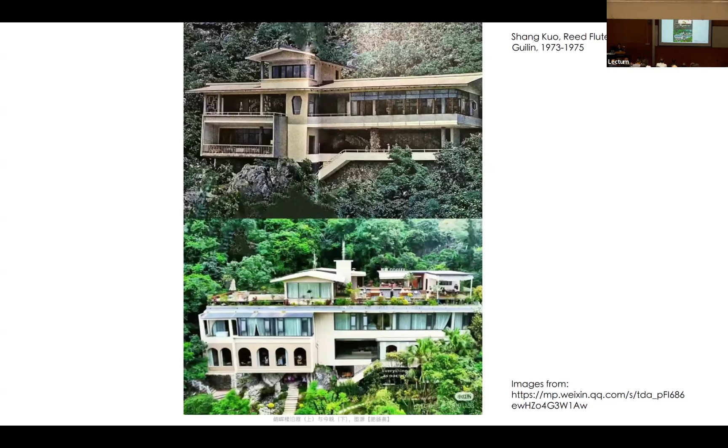Let's begin with a recent controversial renovation project. The upper is the original design and the lower is a hotel transformed from it. The original was a reception house built in Guilin's Reed Flute Cave scenic area in 1975. It exemplifies a local modern approach in China, blending modernist principles with vernacular language. The ground floor of the construction drawing included contour lines and annotations of rocks in the site, and showed how the building integrated with the topography.

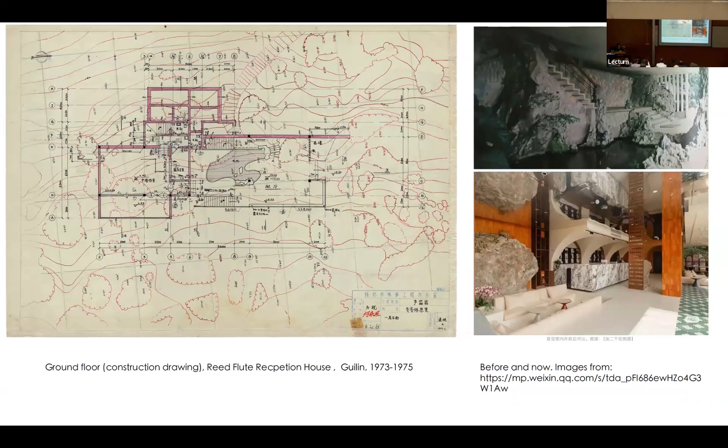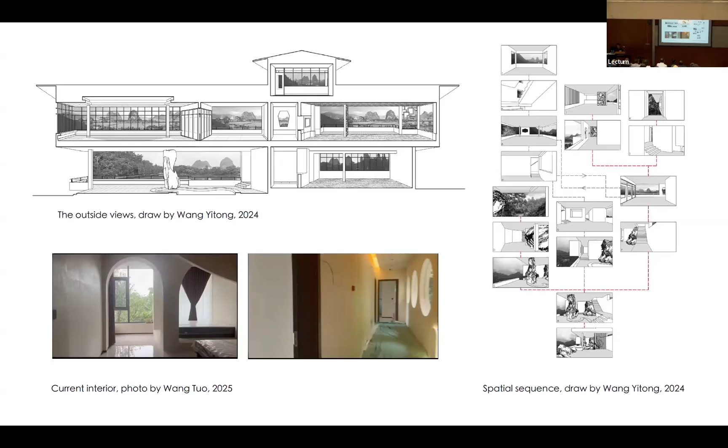These drawings show how the original spatial organization deliberately built up the open relationships between the interior and the outside view. But all these qualities are lost in the current renovation project. These projects were widely circulated in the 1980s. These are drawings by Shang Kuo, the architect of the reception house.

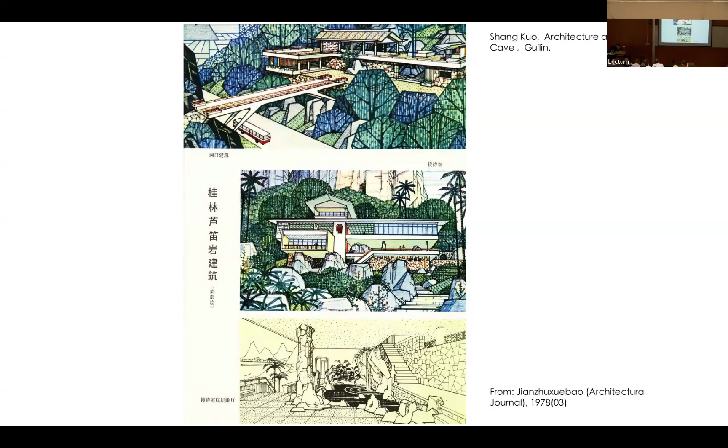A lot of criticism focuses on taste and economic issues. It indeed unveils a lack of awareness about the modern history of Chinese architecture, which hinders discussions on modernity in Chinese architecture and on the value of contemporary Chinese architecture in China. In fact, many architecture students today do not know these works and even have no idea about architecture activities in the 1990s.

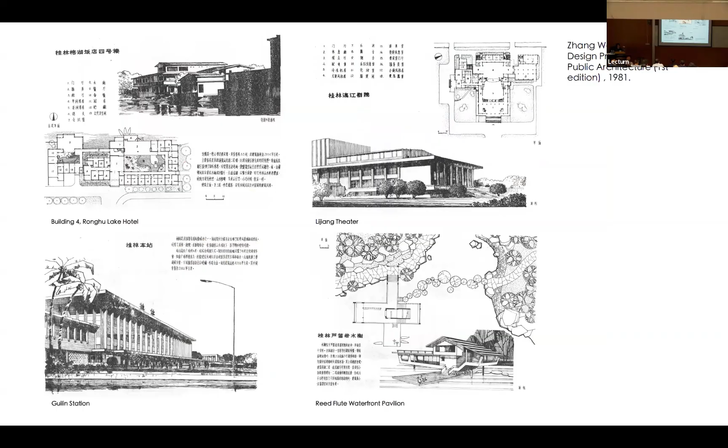This is a widely used design textbook, Design Principles of Public Architecture. Its first edition was published in 1981 and the second in 2001. The first edition had 43 Chinese cases, serving as a record of modern Chinese architecture of the time. Four of them were from Guilin. But the second edition retained only five cases from the first, none from Guilin. Actually, in its 2008 edition, only one project, this one, Tanggu's railway station, was kept. They were all replaced by newly built projects.

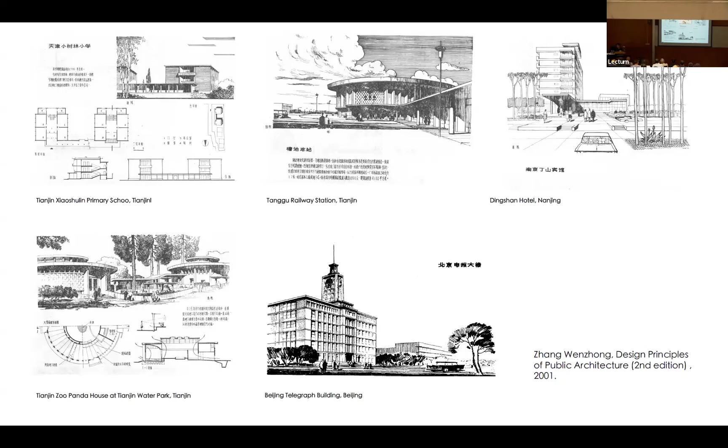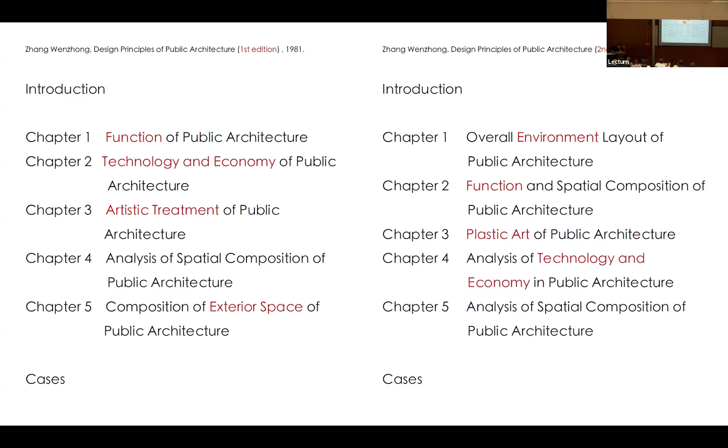Yet, the core design principles remained largely unchanged. Comparing chapter structures of the first and the second editions, there was a shift in priorities. Architectural artistry gained more importance in the design. You can see this move from the list. It is hard to tell how carefully the students read the book, but it reflects the disciplinary consensus at the time.

So let's go to the problem of knowledge, design knowledge. From a historical viewpoint, during the 1950s and the 1980s, architectural projects in China had three major trajectories. Symbolic and monumental, often represented by large-scale public buildings. Functional and productive, such as industrial buildings, housing, and hospitals. The third is a poetic and autonomous approach, often in relatively small scale landscape buildings, blending the modern with certain locality. The reception house is a part of it.

The Outline of Modern Chinese Architecture History, published in 1989, is the first real historical book on post-1949 architecture in China. And it was one of the early narratives which treated pre- and post-1949 architecture as a continuous process. Interestingly, the three authors were not historians and took themselves more as architects.

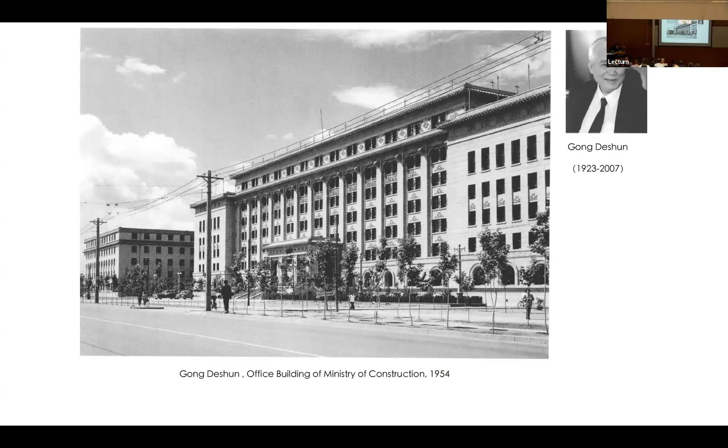And the Chaobasan International Hotel in Mongolia, which was regarded as a celebrated project of modernist design by Chinese architects abroad. After the Cultural Revolution, Gong Deshun made a great effort toward restoring architects' creative autonomy. Thus, the Outline of Modern Chinese Architecture History largely represents architects' viewpoints and values.

This can also be manifested in the second edition of Design Principles of Public Architecture. I quote: public buildings of different purposes exhibit notable distinctions in architectural artistry. Civil buildings like offices, schools, and hospitals constructed en masse for public services should prioritize clarity, simplicity, and restraint. Large-scale edifices, hotels, theaters, stadiums demand sophisticated artistic treatment due to functional complexity.

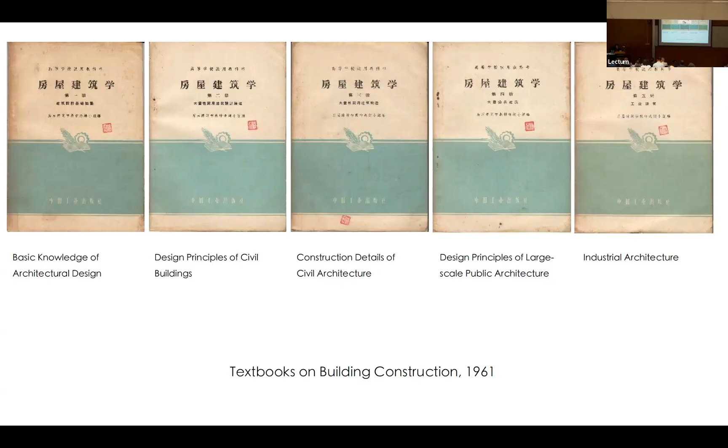And the third problem is the concept, or relation between words and the buildings. Loosely using concepts is a big issue in Chinese architecture, and it could be exemplified by two texts, Feng Jizhong's Principles of Spatial Planning and Peng Yigang's On Architectural Spatial Composition, published at almost the same time. While the English titles differ, they both use the same word in Chinese, 组合. But if we look at the designers' design works, the distinction is obvious. Feng came from German modernist training in the 1930s, while Peng's were largely based on the Beaux-Arts tradition. The shared terminology obscures divergent knowledge systems.

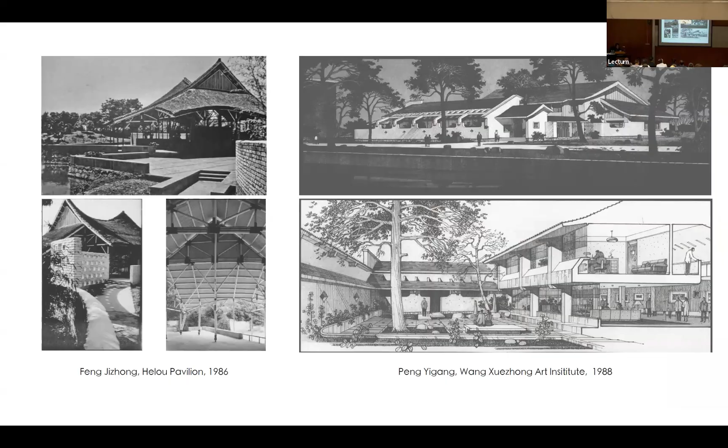When Adrian Forty observed the vocabulary of modern architecture, he found out modernist language is a system. He said, wherever two or more of the words form, space, design, order, or structure are found in company, one can be sure that one is in the world of modernist discourse. Disturb one and you disturb the lot.

The way modernists used words corresponded with their ideas on architecture. It sought neutral, non-metaphysical terms, except those from language and science, to assert architecture's autonomy from art. And one of its features is a general tendency to render what is concrete abstract. Against this problem, that's the context in which the new knowledge centered on construction was formed. I will examine it from four aspects: ideas, institutionalized knowledge, tools, and objects.

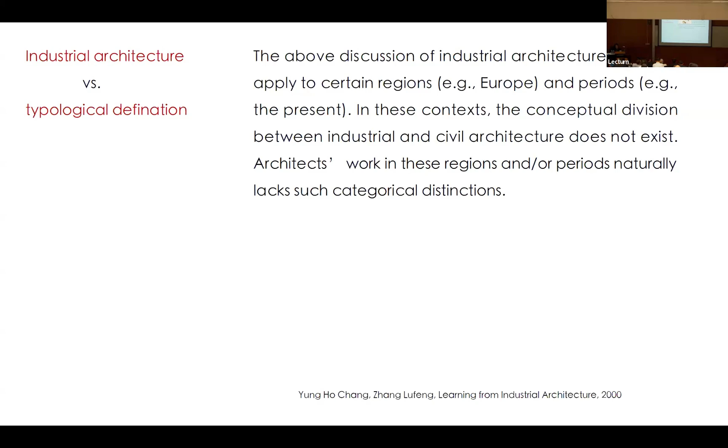Around the same time, Nanjing-based architect Zhang Lei proposed his vision of fundamental architecture. In his statement, the term ordinary appeared more than one time. Constructing architectural quality through ordinary materials, construction methods, and building types became a characteristic of the new practices during this period.

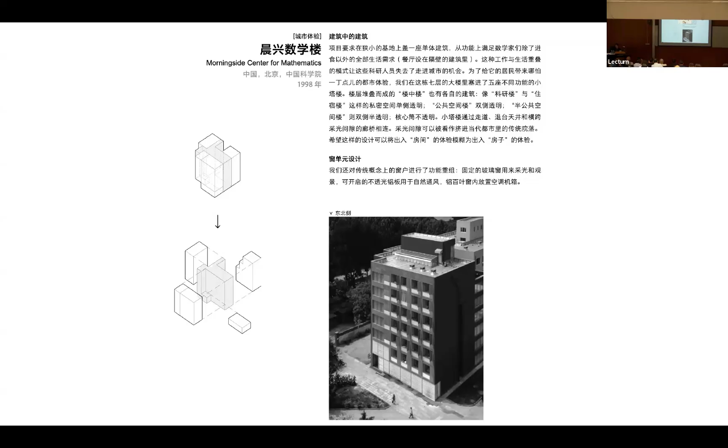This is the Morningside Center for Mathematics office building designed by Feichang Jianzhu. They embedded the concept of a micro city into the spatial organization of the single building volume, creating a building complex within a building, using varied materials treatment while employing the then prevalent concrete frame structure.

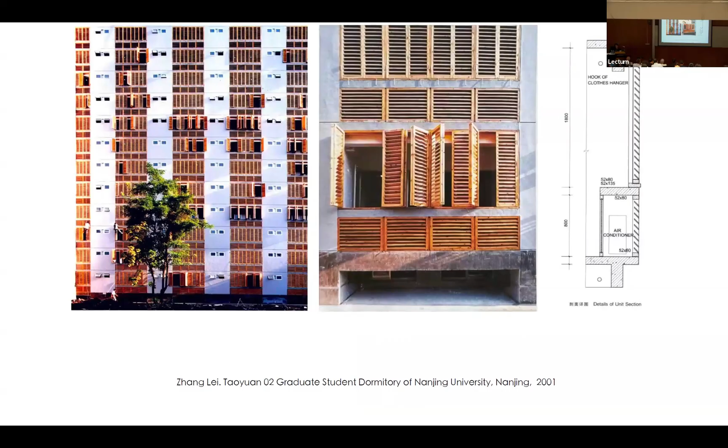Another example is the student dormitory designed by Zhang Lei in 2001. Adopting a typical central corridor arrangement, it translated the requirements for ventilation, storage, and privacy into architectural language and visual expression. For Wang Shu, even lamps, fixtures, pictures possessed architectural quality, as seen in his 1997 design called 8 Unlivable Rooms.

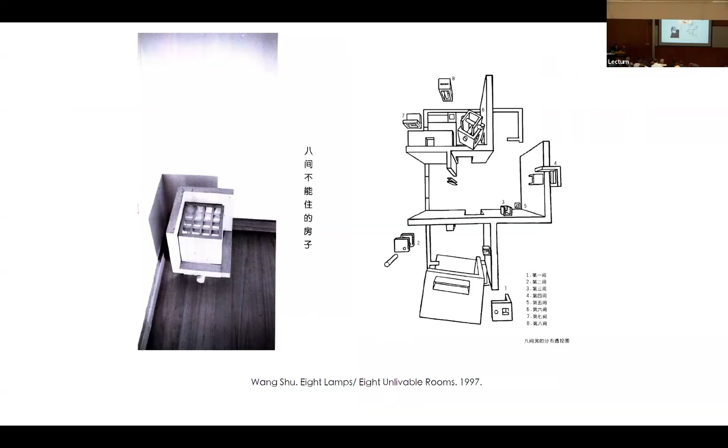He remarked, I quote, "For me, whether an architecture concept can permeate into details is not merely a technical issue, but a transformative perception that returns to the details and the life itself from the very beginning of the design." Well, one might attribute this to the project types available to them at the time. It is a conscious choice, and more significantly lies in the embedded architectural understanding and philosophy.

Architecture's significance resides not only in typology, scale, or symbolic reinterpretation, but in infusing ideas into the act of construction and the inherent architectural quality of building. Notably, this differs from abstraction; returning to the basic or original means reducing things to an irreducible state while preserving or revealing their fundamental attributes.

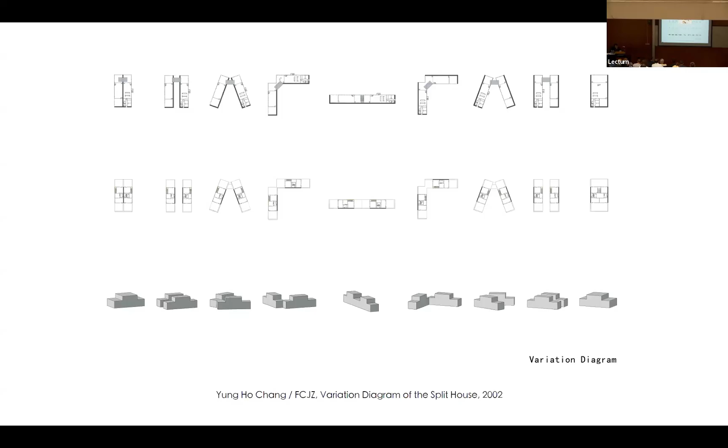Zoom in, we can see the wall solidities, opening directions, and the staircase position. It's somehow like the Beaux-Arts parti. We might call it abstraction with materiality.

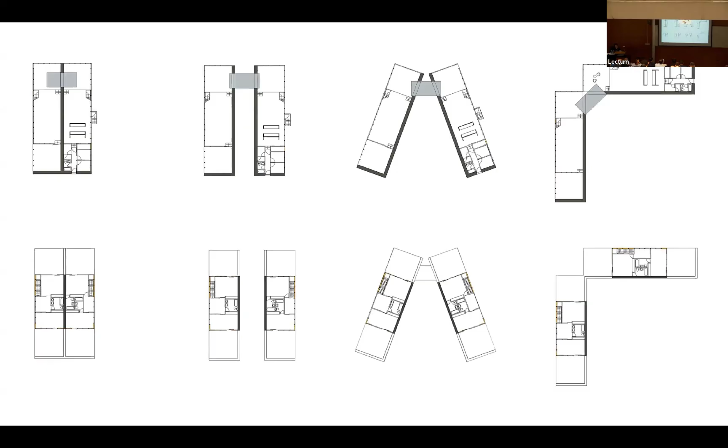Institutionalized knowledge to schools. In 2000, two new architecture schools were established: the Graduate Center of Architecture at Beijing University and the Graduate School of Architecture at Nanjing University. Both aimed to build a new pedagogical system based on new understandings of architecture knowledge.

They all took construction and the tectonic as a core curriculum and research direction in design. This is for the Graduate Center of Architecture in Beijing University. Here is the research direction. This is the Graduate School of Architecture at Nanjing University, and Professor Wang Junyang is a part of this. This is the design course arrangement in Nanjing University: basic design, conceptual design, and tectonic design.

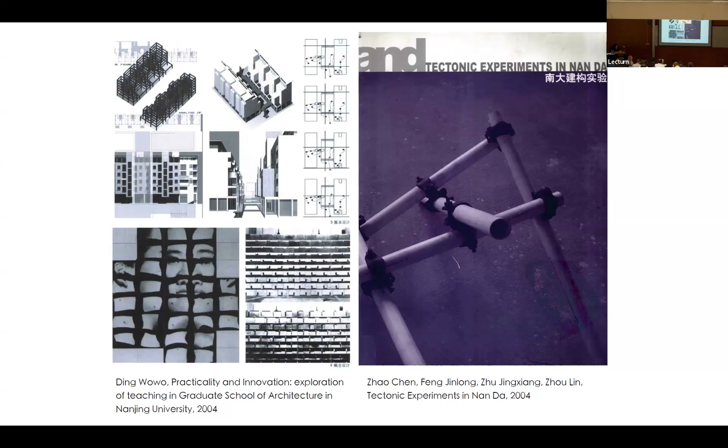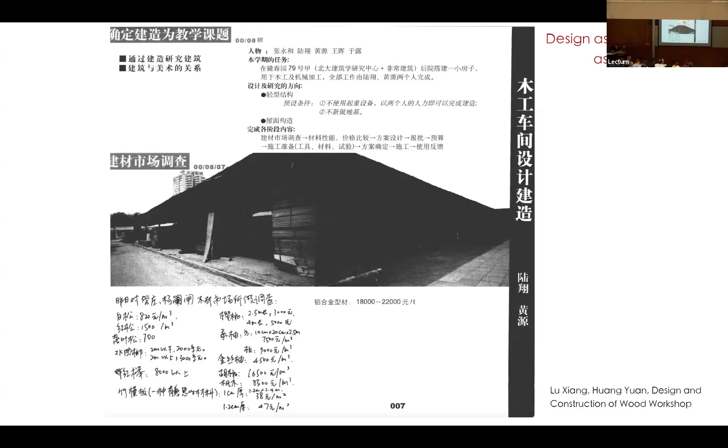This documents the construction course at Beijing University. The course was to build an actual building, a wooden workshop in the courtyard of Beijing University's Architecture Research Center. The complete documentation reveals a research process encompassing comparative analysis of multiple proposals, material-based structure calculation, etc., and also the engagement of students in drafting, calculation and the labor work on site.

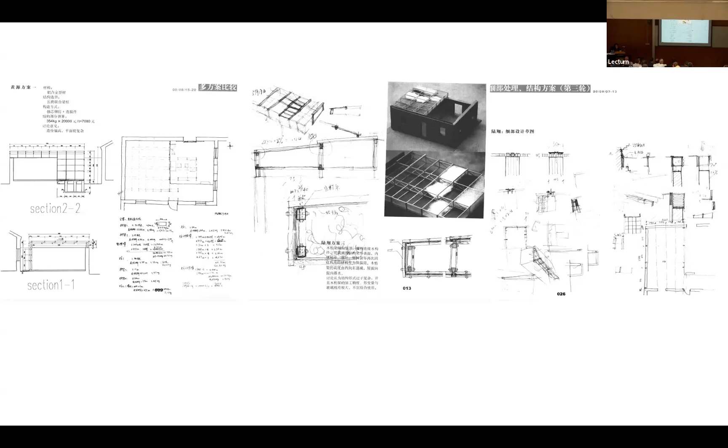Yeah, it's 5 minutes. Okay. So I skipped some images and yeah, this is what they do.

Manual operation becomes important in the design process. It might be unexceptional in European or American architecture schools, but it has distinct significance for China. As Zhao Chen commented, to promote tectonics is to resist the negativeness in contemporary Chinese architecture, i.e. the tendency to label architectural creation with styles, the commercial inclination of architecture subject to economic power, and the cheap symbolism of architecture attached to political power or mass production driven by consumerism.

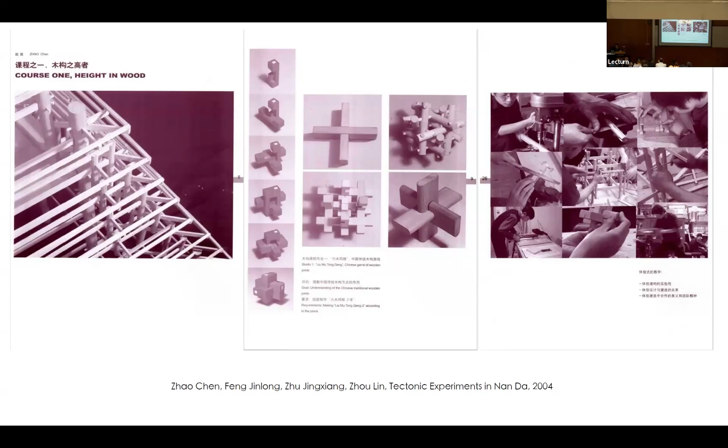And simultaneously, the tectonic perspective allows re-examination of China's architecture traditions and facilitates cross-cultural reassessment of global architecture heritage. Zhao's perspective manifests in the editorial structure of the first issue of Nanjing University's A+D journal.

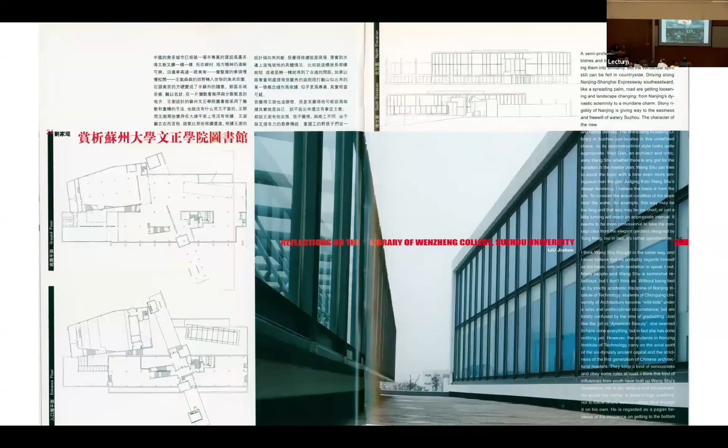This inaugural issue featured international architectural works, projects by young Chinese architects, criticism including Liu Jiakun's comments on Wang Shu's Wenzheng College library, documentation of the contemporary Chinese urban condition, and importantly, a theoretical framework in global context by Professor Wang Junyang's interpretation of Frampton's study in tectonic culture. It also includes an interview with Feng Jizhong on tectonics.

The bilingual publication shows their intellectual ambition to contextualize domestic practice within international theoretical discourse, with the attempt of constructing a modern tradition for Chinese architecture.

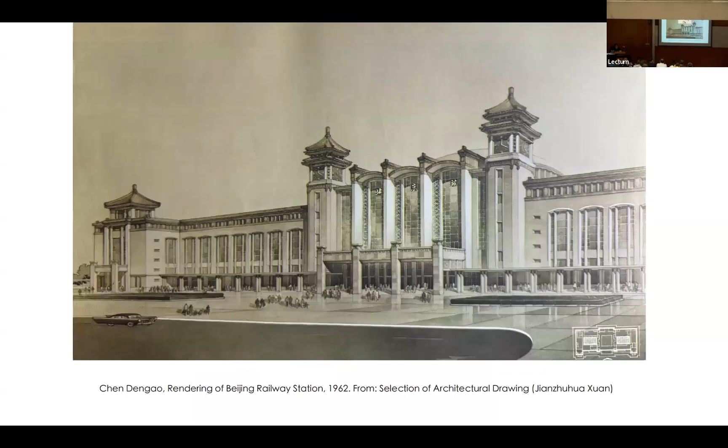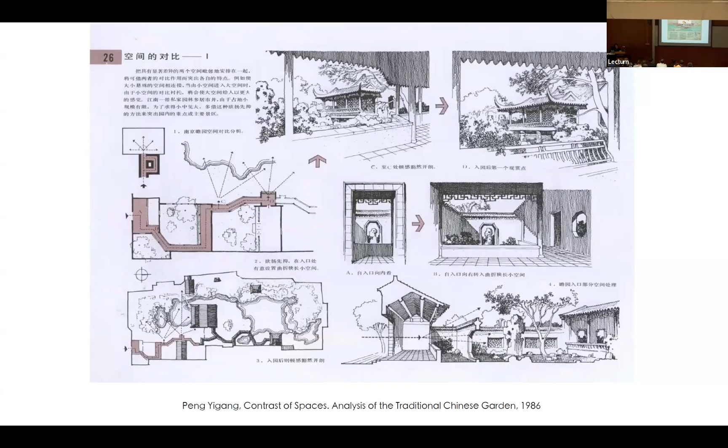The tools. The drawing. I skipped this. Drawing is always important for the architecture discipline, and from Jeff Kipnis's viewpoint, a drawing itself possesses autonomy and independence. Drawings are important in Chinese architecture education, and that's a basis. And the rendering shows the representation, as an analysis and research tool, and also as construction guidance.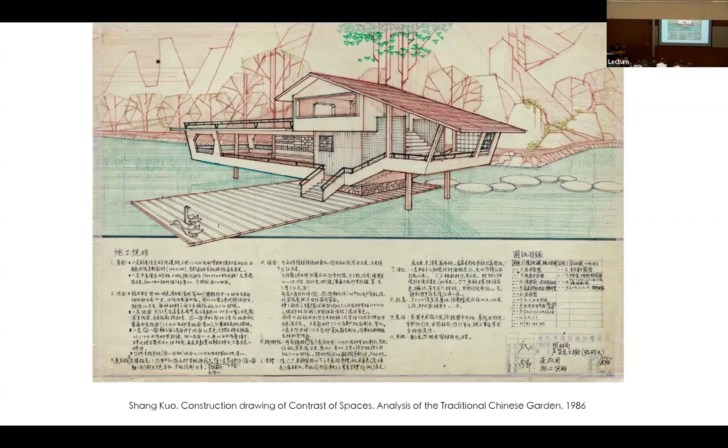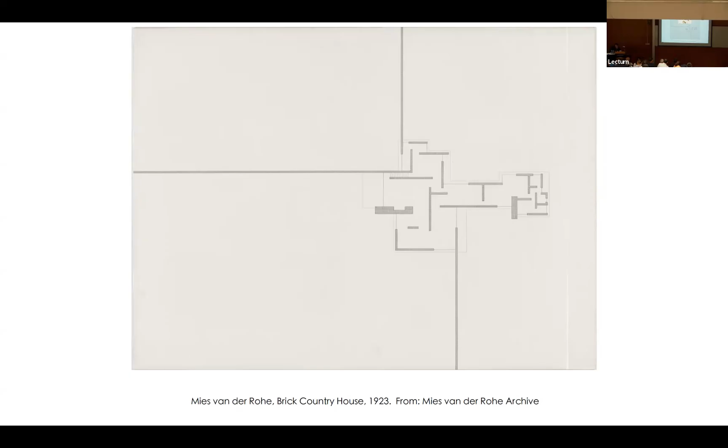Yung Ho Chang stood out as one of the few architects who consistently reflected on this tradition. Against drawing in fine arts architecture, he promoted drafted drawing, and he differentiates between drafted drawing and artistic drawing. Quote, for him, architecture's essential skill is drafting, not painting. Painting or artistic drawing belongs to aesthetic cultivation, while drafted drawing constitutes paper construction, and drafted drawings prioritize precision and accuracy over aesthetic quality. Skip this.

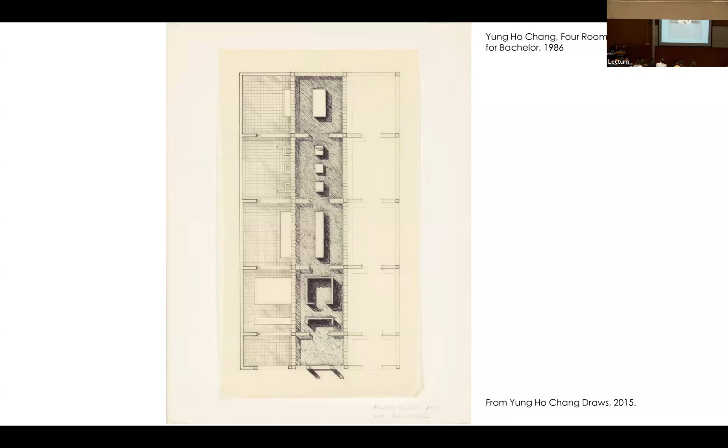Yeah, this is another drawing, and it's even like they put the axonometric drawing and the plan together, but it's not easy to understand at first glance. You have to read it carefully and find that some parts actually cannot really be shown in this drawing, in the plan.

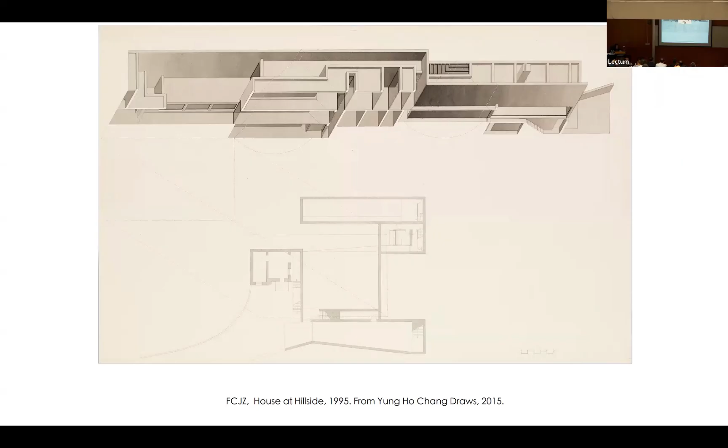The sectional axonometric uses a U-shaped cut through the building interior, unfolding to reveal a continuous spatial composition, a vision beyond instant perception. This was already shown by Yung Ho.

And what I want to emphasize, if you see this kind of multiple... these are kind of a collage of the different types of drawing, and actually, if you look at the drawing, you have to move through it. It's this kind of reading of the

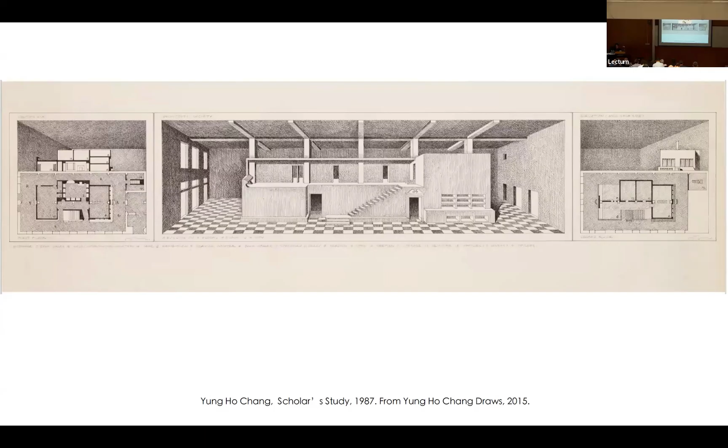collage of the axonometric and the multiple vanishing point perspectives keeps the viewpoint in constant motion, requiring intellectual and perceptual interaction to achieve interpretive discovery and pleasure. Wang Shu also demonstrated this acute drawing consciousness in his sketchbook.

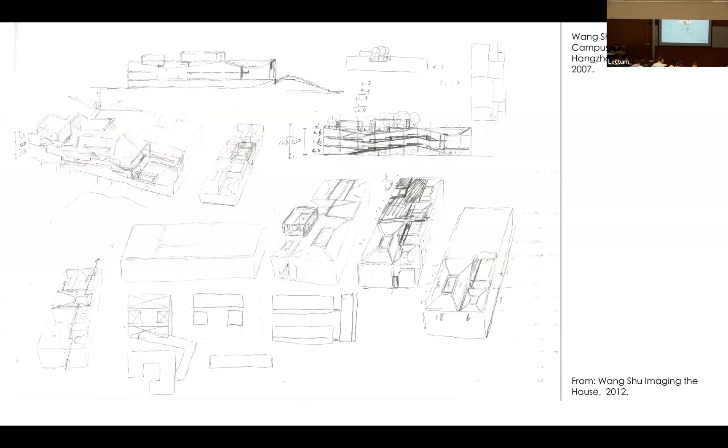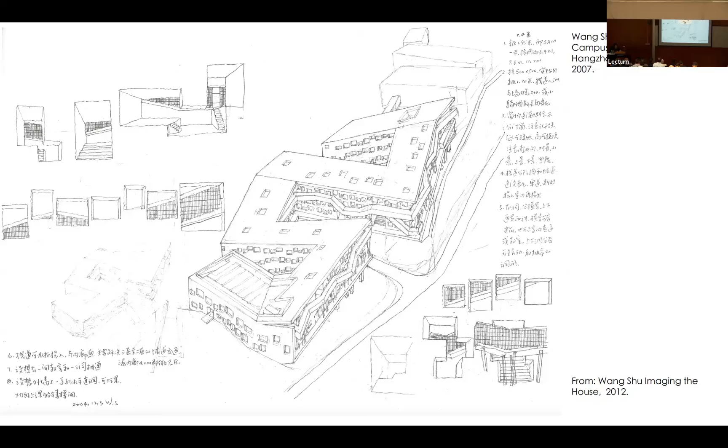Imaging the House. We see the design development primarily through axonometric sections and the instrument-drawn plan. These drawings showed how he put the whole building with the fragments together in the sketch as a study of it. Yeah, the relation. The interrelation between the words, tools, and the objects.

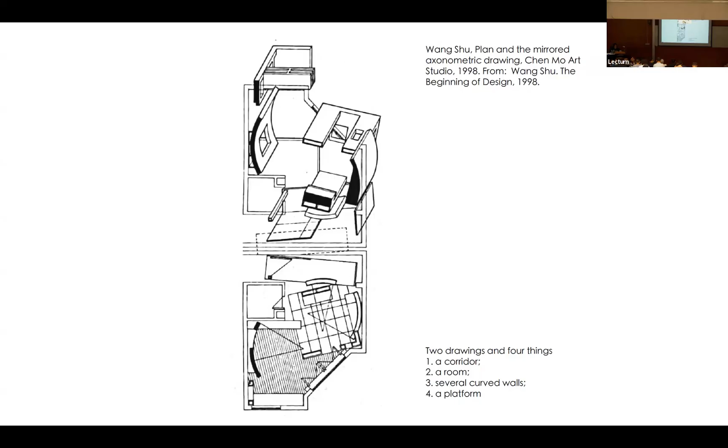This is Wang Shu's drawing for Chen Mo Art Studio, the plan and the mirrored axonometric drawing, which equally requires careful reading. At the same time, his description notably avoids conceptual terminology, using concrete elements: corridor, room, wall, and platform. This makes the idea embedded in the material elements. With the drawing, the element also actually has a certain abstract quality.

Yung Ho Chang already talked about the project of Xishu bookstore in Beijing. Okay. My talk kind of continues the story. It was demolished in 2000. It only existed for 4 years. But my argument is that because of the demolition, the idea, the concept, seems more important than the drawings and more important than the real object. But actually, it's not the truth.

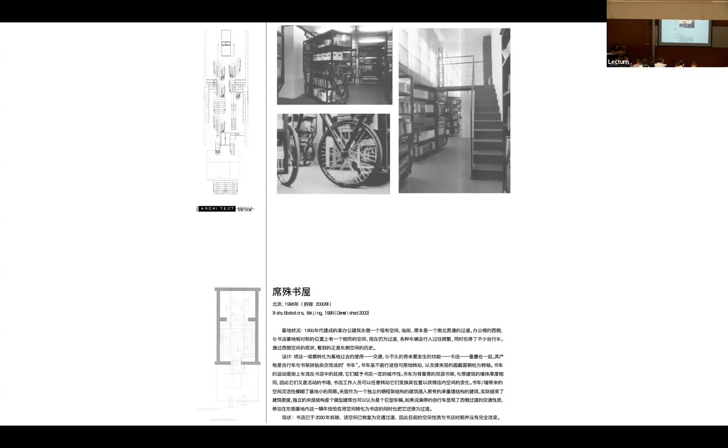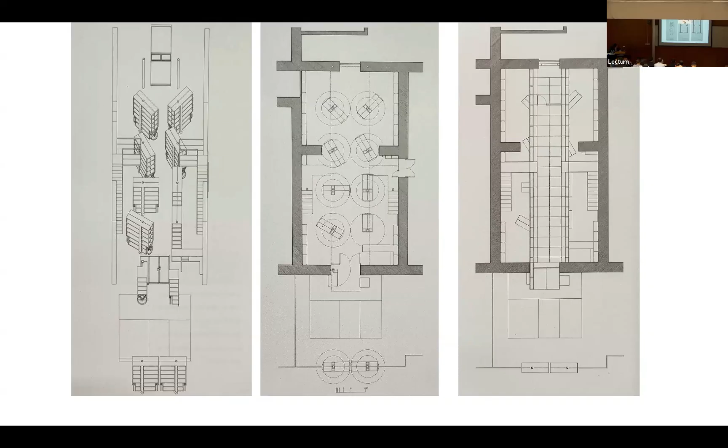What I want to say is that the drawing itself has its own life. If you look at this drawing, it's actually plan, section, and axonometric put together. It shows qualities you haven't really seen or experienced in the concept or the real building. But the perception is also astonishing and striking. So what I want to say is the success of Beijing Xishu bookstore precisely lies in the interplay and the independence between concept, drawing, object, and perception.

To sum up, contemporary Chinese architecture should not be perceived mainly as a temporal designation, but rather as a new practice of knowledge. Alan Colquhoun once stated, modern architecture could be understood more specifically as architecture conscious of its own modernity and striving for change. This consciousness could serve as a way of understanding contemporary Chinese architecture, a consciousness of history, of reality, and of striving to construct new knowledge.

Through the efforts of Chinese architects and scholars, design has become a researchable discipline, while practice has become a driving force for new construction. They indeed absorbed modernist ideas and approaches, as well as criticism of them, yet consciously selected, reinterpreted, and modified them based on their reflections on architectural history and reality in China. Clearly, construction is one aspect, and yet probably the most influential one on architectural discourse and the improvement of building quality in present China.